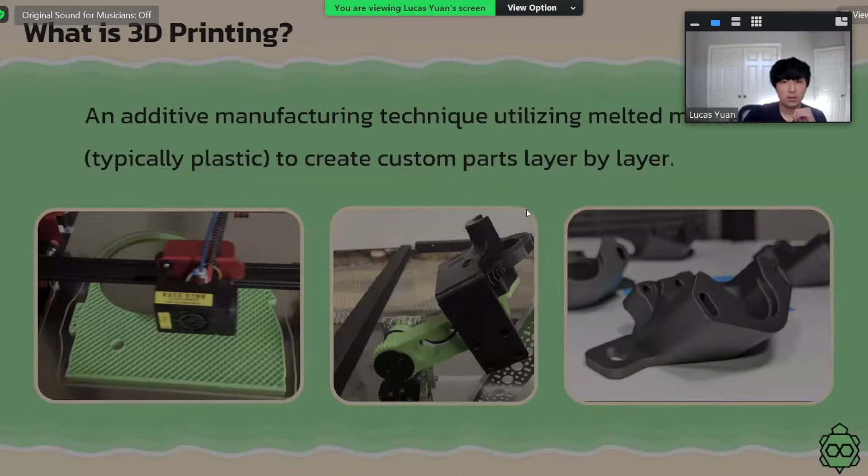As for applications, you can use 3D printing for a lot of different things. A general rule of thumb is that you can print basically anything, as long as it's strong enough, isn't bearing a ton of load, and won't break under the loads we typically see in FTC. Some places it's used are gears and pulleys to power wheels, claws, and arms.

Finally, one of my favorite uses for 3D printing is aesthetics. These are both examples that my team has used. On the left are sponsorship badges that we used on our state bot in Freight Frenzy, and on the right is our worlds bot, where we used 3D printing as a stack between our metal plates to create this kind of turtle shell effect.

I also want to touch on the advantages of 3D printing. The first and main one is rapid prototyping, as well as having quick turnaround times. The second is being able to create precise details. The next would be having more mounting options versus commercial parts.

The reason I say this is because with 3D printing, you can really customize where you're mounting certain things, whereas with commercial or off-the-shelf parts, you're limited to the specific hole pattern of the vendor you're buying parts from. Finally, it also gives you good design experience as well as learning CAD skills.

Yeah, I'll actually talk about that a bit more, but in general for threads, if you're threading directly into a 3D printed part, it's a good idea not to take out that screw and put it in over and over again, because over time it will wear out compared to metal threads. But there are ways to get around that, and I'll make sure to address that in a bit.

As for the disadvantages of 3D printing, prints do still take a long time, and you'll probably be confused because in the previous slide I just said there's a quick turnaround time and that prototyping is rapid. But I think there's a distinction to be drawn here.

The prints do take a long time, but in the grand scheme of things, if you're considering how long it would take to order from a vendor and get those parts shipped and delivered to you, 3D printing would still win out against COTS parts or off-the-shelf parts.

The second disadvantage is that 3D prints are less strong than metal parts. There are ways to increase the strength of 3D printed parts, but in general, plastic is not going to be as strong as metal. So we typically try to avoid using 3D prints in places where a robot would be stressed.

Next is that there's somewhat of a learning curve to 3D printing. While newer printers with better technology are lowering this learning curve, there is still very much a component of knowing what you're doing, which makes it easier to 3D print well and consistently.

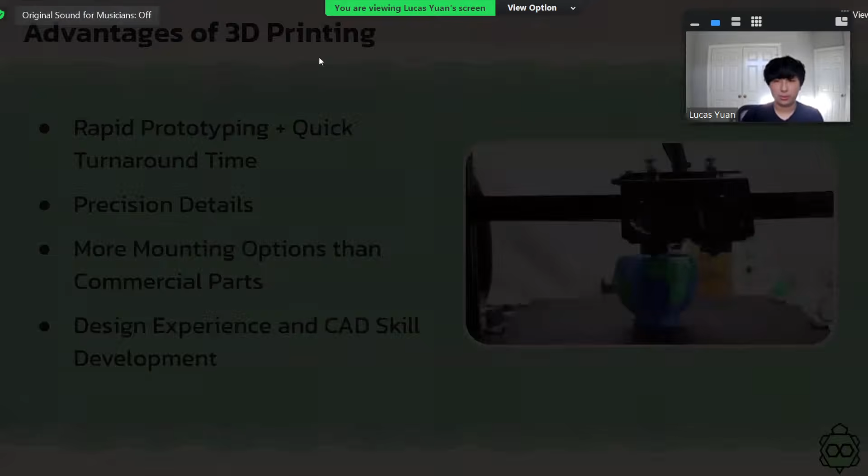And then lastly, 3D printing can be expensive because you have to purchase printers as well as filament, and that adds up a lot over time. But there are newer 3D printers coming out that really lower the cost of entry. Whereas maybe a decade ago it might cost $1,000 to $2,000 to get into 3D printing, now you can get into it at a very low cost while achieving the same, if not better, results.

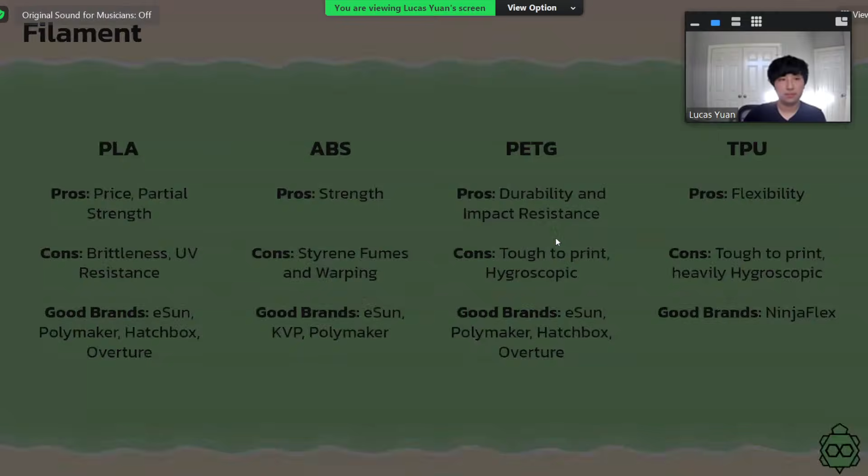Now we're going to talk about post-processing and add-ons, which will also address the question that was asked earlier about 3D printed threads with heat set inserts. So heat set inserts are basically metal inserts made of brass that you use a soldering iron to press into your 3D prints.

So you're basically printing an undersized hole in your prints and then melting around that hole to push the inserts in. These are used to add threads to your 3D printed parts, so that your screws don't round out your mounting holes. The reason I like heat set inserts is that they're really easy to design with as well as use.

But as for alternatives, there are also self-tapping screws as well as just designing a spot where you can put like a T-nut or lock nut inside of. So there are really a lot of ways to get around having to use 3D printed threads. Those are all great options, but personally, I love to use heat set inserts.

Next up, I want to talk about annealing. Annealing is something we do to increase the part strength of 3D printed parts, and it typically increases the strength the most in the Z axis.

So if you think about how 3D prints are made, they stack up one by one. But those individual layer lines create places where 3D prints are inherently weak. Because if you think about a solid piece of plastic, there are no lines where it can crack along. But with 3D prints, those layer lines are inherently weak. So what we do with annealing is we put the print in an oven or a heat source to melt those layer lines down and effectively create one solid part.

Next up, I'm going to talk about how to design for 3D printing, and walk through a couple of examples of parts our team has printed before and how they were specifically designed to print well. The first part of designing is that you need CAD files of your parts, and you can use any software to design them. Our team personally uses Onshape, and I know a lot of teams use Fusion 360, but I'd recommend Onshape if you don't already have experience with other CAD software because it's really easy to pick up, it's browser based, and it has a lot of support.

One of the biggest general rules to keep in mind for 3D printed parts is that you shouldn't have overhangs over 45 degrees. If you look at the graphic in the bottom left corner, the first two pictures show overhangs of less than 45 degrees and equal to 45 degrees, whereas the picture on the right shows an overhang of over 45 degrees. We try to stay away from overhangs over 45 degrees because 3D printers work by stacking layers on top of each other. If you had a perfect 90-degree overhang, you'd basically be printing in midair, which doesn't work. As the overhang angle gets closer to 45, it'll be better, but it'll still require supports, because 3D printers are limited by how fast they can cool the plastic coming out. If it can't cool the overhang fast enough, since it's not supported by anything other than the previous layer, it can result in pretty bad print failures or just not making the part the way you wanted.

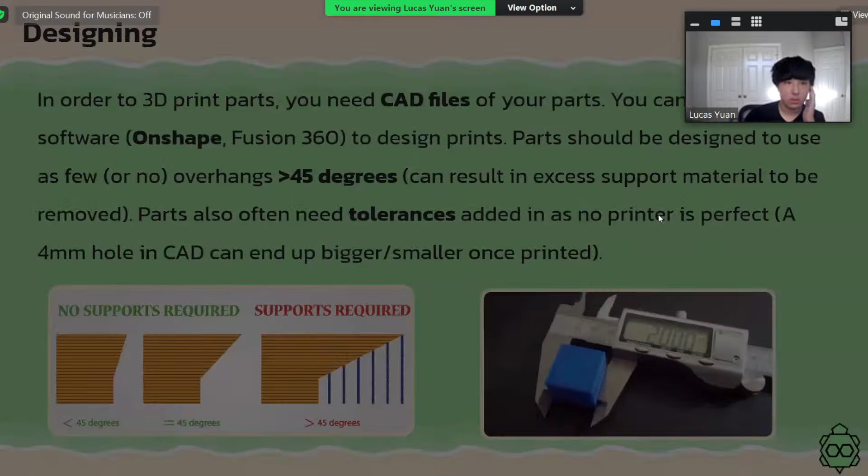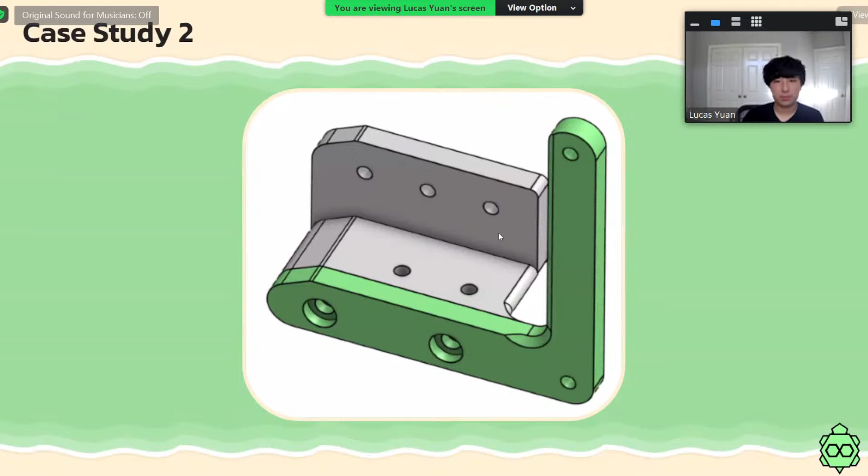The second thing I wanted to talk about here is this two-piece part. It was originally one piece, but it would have been really difficult to find a flat surface for this part that doesn't use supports. So what we actually decided to do was split this part in two, with the green part being one piece and the white part being the other. This allowed us to have two parts that were really easy to print separately, and that we could use screws to join together afterwards.

Now this is one of my favorite parts that I've designed. This was actually a hard stop for our arm this season, so when our arm would come down, it would rest on top of this.

And it also was a mounting point for our color sensors, which is this excess piece that you see here.

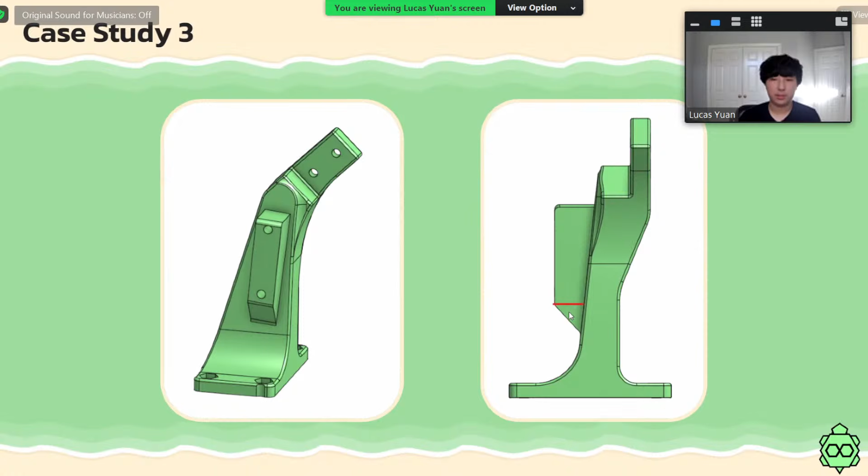The biggest takeaway from this part is designing for overhangs. There are two places where that really takes place: this excess part here, as well as the part at the top. In both cases, the overhang is 45 degrees or less. If you look here, I drew a red line to show where I could have stopped this part had I not been thinking about designing for 3D printing explicitly. But because that was kept in mind, I decided to increase the angle of this bottom part to be exactly 45 degrees so that it could be printed without supports.

Now we're going to talk a little bit about slicer settings. To answer what a slicer actually is: a slicer is the step between CAD and actually printing the object. After you have your CAD file, you put it into a slicing software, and it does exactly what the name implies - it slices your model into the individual layers that your printer reads, called G-code. In the slicer, there are a couple different settings you can configure for your part, and this will change the properties once your printed part is finished.

The second thing is infill, which is what this picture on the right is trying to highlight. There are a lot of different infill patterns you can use - maybe 15 to 20 baked into slicers - but I would really only recommend 2 of them: cubic and gyroid. The reason I picked those is because they're 3D infill patterns, meaning that rather than having the same cross section as you move layer to layer, the cross section changes, which means your strength in the z-axis is less compromised than if you use something like a grid or triangle infill pattern.

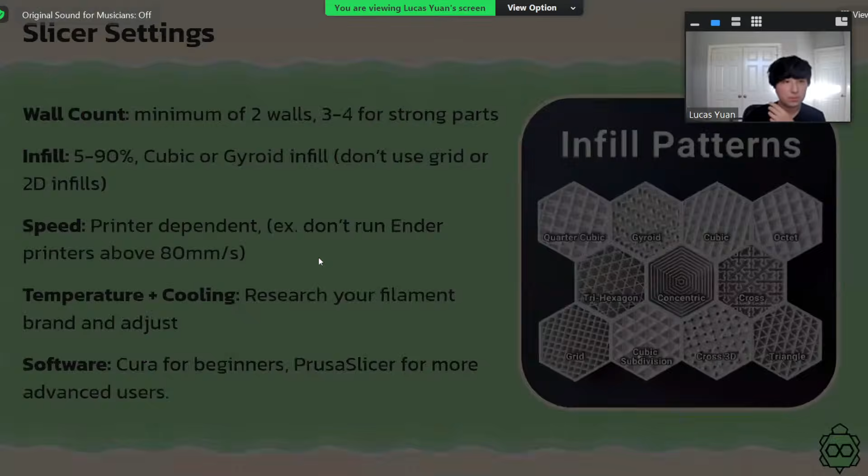The next thing I want to talk about is a little bit about print troubleshooting. There are a lot of things that can go wrong with 3D prints, but I think the biggest thing I see a lot of teams asking about is print bed adhesion.

What that means is how well your print sticks to the build surface. That's really important because we want the print to stay, obviously. Otherwise, our print moves won't be accurate. So if your print isn't sticking to your bed, it could be a couple things.

The first thing could just be that you're printing too high. In that case, you want to adjust the height of your prints or the height of your nozzle down closer to the bed. The second thing could be that your print surface is dirty.

The next thing would be just applying a light layer of glue stick. I actually use glue stick on the vast majority of the prints I do, just because it's kind of a cheat code to creating bed adhesion.

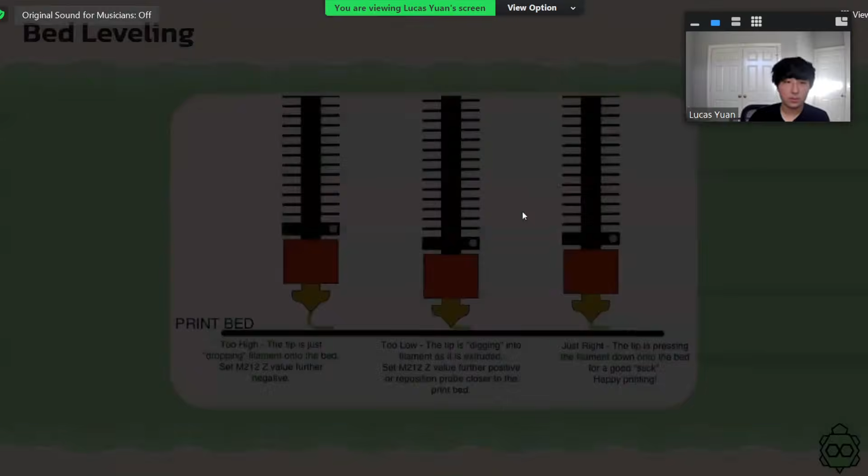And now I just wanted to talk a little bit about bed leveling, which was mentioned on the previous slide. So if your print bed is too high, then the plastic coming out of the nozzle will kind of just be dragged around the bed. It won't really stick to the bed where it was meant to be put down.

Whereas if the print bed is too low, then the tip of your nozzle will dig into the filament when it's extruded, and this will create ridges in your print, which are fairly noticeable. But if your bed leveling and adjustment is just right, the tip is pressing into the filament slightly, but it should stick to the bed very well, and there shouldn't be any noticeable gaps in between the lines of your print.

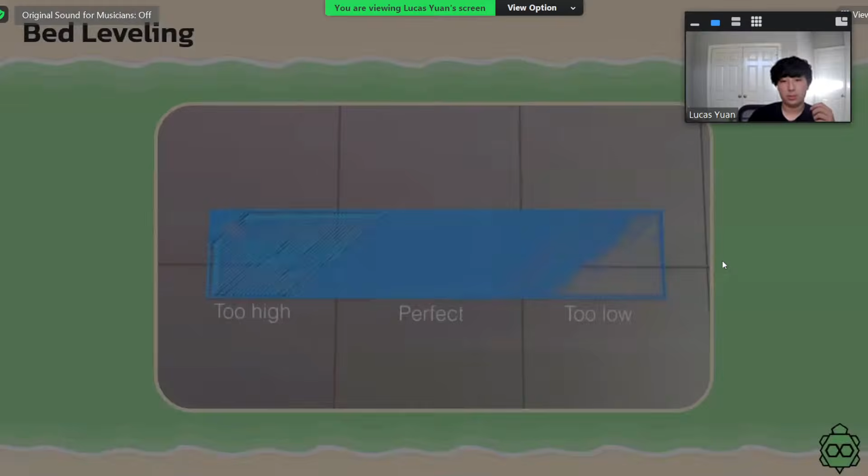So what this kind of looks like is this. On the left, the print nozzle is too high, and you can see that there are gaps in between each of the lines. It's not really staying flush to this wall, these perimeters.

And then on the right, you can see when the nozzle is too low, that you're not really getting a lot of extrusion. You're seeing those ridges, and because the nozzle is pressing so far into the filament, it doesn't really even come out very well. Whereas in the middle here, when your bed level is set correctly, you'll see that there are really no gaps in the filament.

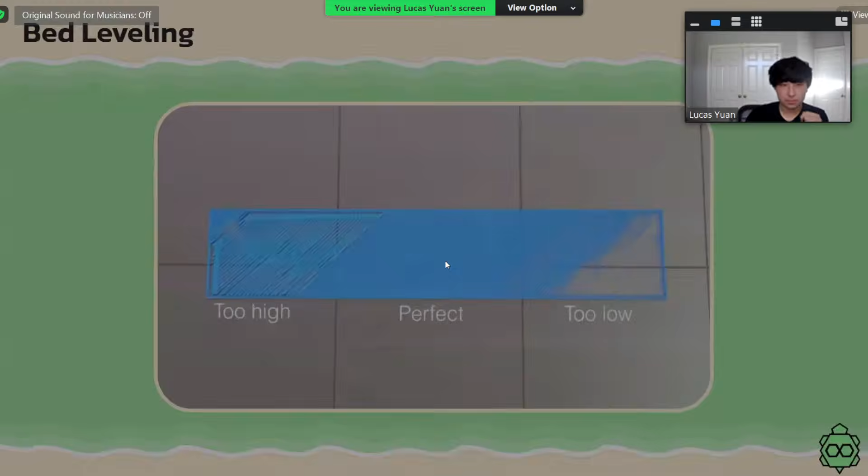So that basically wraps up the presentation.

And I just briefly wanted to talk about some resources for 3D printing. The first one would be FTC Docs. This is the official FIRST documentation, and it has a really long section about 3D printing, which our team contributed a majority of.

The next one is All3DP, which collects filament data as well as gives printer reviews. So if you're looking to buy a new printer, I would definitely recommend looking at some of their reviews.

Next is CNC Kitchen. This is a guy on YouTube who does a lot of scientific and strength testing videos on filaments as well as print settings. A lot of the data he has is really good, and I would definitely recommend checking him out if you're considering doing something more interesting with your 3D prints.

The FTC Discord is another great resource. Specifically, the manufacturing channel in the FTC Discord is really helpful. There's a lot of more knowledgeable people about 3D printing in that channel that will help people troubleshoot their issues. I personally help a lot of teams in that channel, so you can ping me if you're ever there.

Yeah, that's a really good question. For troubleshooting, I think most of the time it's the printer, not the part. There are some instances where it'll be the part, but in those instances it'll be fairly obvious. For example, if you're trying to print in midair, the printer obviously isn't going to be able to do that. But for troubleshooting, generally there isn't a roadmap as to how you go about that. You usually want to identify what the failure case looks like, and then based on that, you can determine a list of things that might be causing it, and go through that one by one.

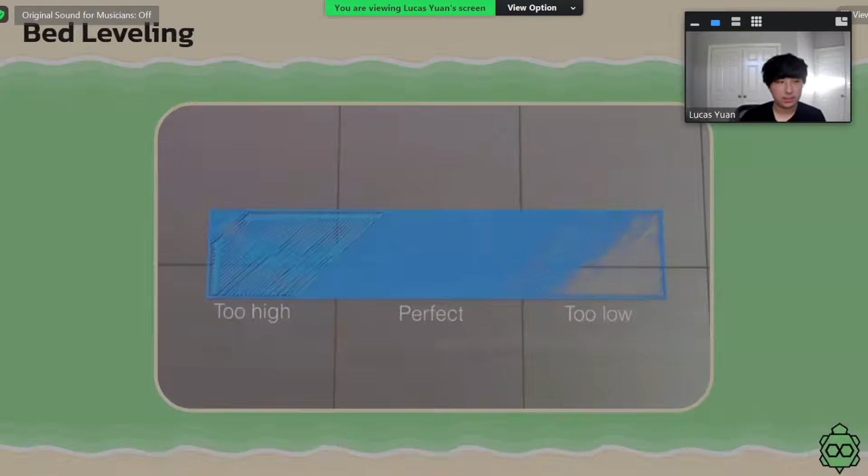That's something that will come with experience, but you can also just use the power of Google. So if you notice that your print is under-extruding, which basically means it's not putting out as much material as it should, you can just Google reasons a 3D printer might be under-extruding, and there are websites that will list every possible reason. Then you can just check to make sure it's not those reasons.

Okay, so Hudson in chat asked, what printer do you have?

I have a VZ bot, and I think Hudson knows that.

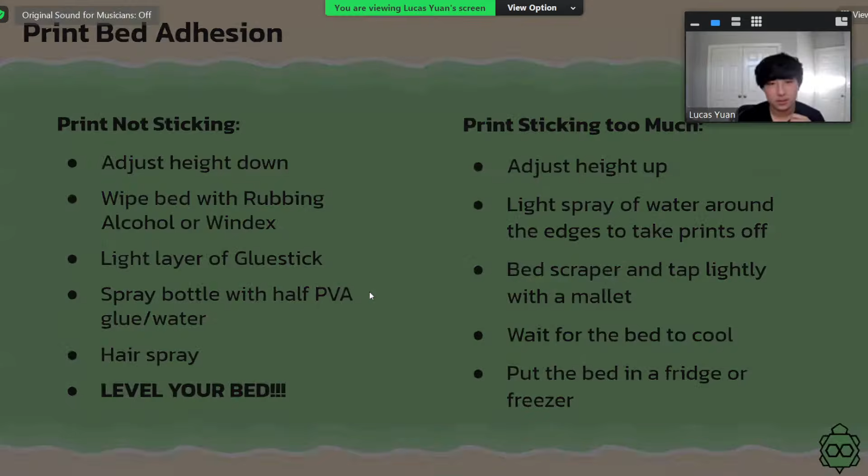Okay, going backwards here. For $1,000, honestly I would get the Bambu Lab P1P over the Prusa Mark IV. The reason is that while Prusa printers are very reliable, the Bambu Lab is just a much better bang for your buck. But I think the Prusa is also a really good option, and if you're already invested in the Prusa ecosystem, the Prusa Mark IV might be worth it.

As for $250, I think getting an upgraded version of the original Ender 3, like the Ender 3 Pro, Ender 3 V2, or a similar Ender clone, can be good. At that price point, I'd recommend an Ender clone because those machines typically have a lot more features than the original Ender series. While they're less tested, they pack a lot of features, and some of the more notable Ender 3 clones actually have a lot of users and an established knowledge base as well as support team.

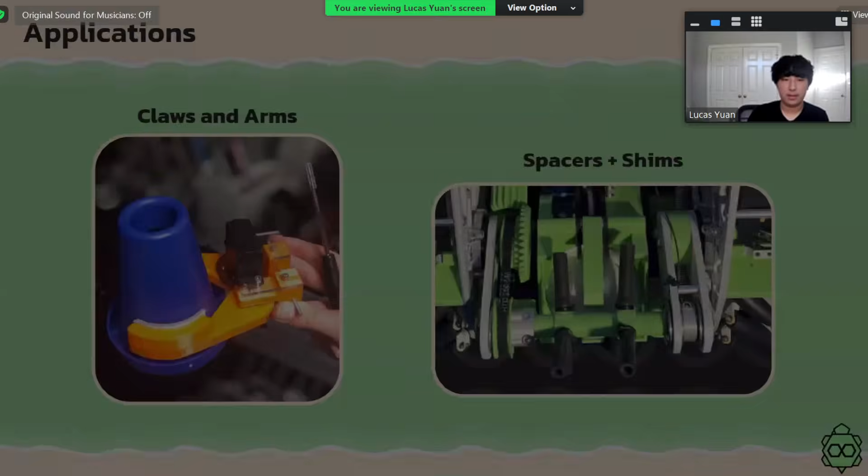But generally, for the majority of parts, particularly the ones I listed at the start, you won't really need exotic filaments. I do know they're being used more by teams and becoming more accessible. Specifically, blends of typical filaments with carbon fiber or other exotic materials are much more affordable and usable than they were a couple years ago. Off the top of my head, PLA carbon fiber, ABS carbon fiber, glass fiber infused filaments, and stuff like that is a lot easier to use now.

Yeah, I know Prusa does this specifically. I think there are merits to going both ways. If you're getting a printer kit to build yourself, typically it will be cheaper. Another thing that isn't really mentioned is that building a printer can actually give you a lot of experience in the mechanical aspects of FTC. I actually built a Prusa Mark 3S Plus around two-ish years ago.

It was a very fun experience because Prusa does such a good job of documenting those instructions. They have their own forum for people building the printers, so if there's something even the instruction manual misses, which is very uncommon, it will almost always be answered by the community. It's just a very well documented process.

But as for going pre-assembled, I also think there are merits to that, where you don't have to worry about assembling something wrong, or if you're just not confident in assembling the printer, getting pre-assembled would be a better option. But getting a pre-assembled printer does typically cost more than a kit build. For Prusa specifically, the price I have here is for the pre-assembled version, whereas the kit built version, I don't have the number off the top of my head, but I think it's 899 or a little bit more.

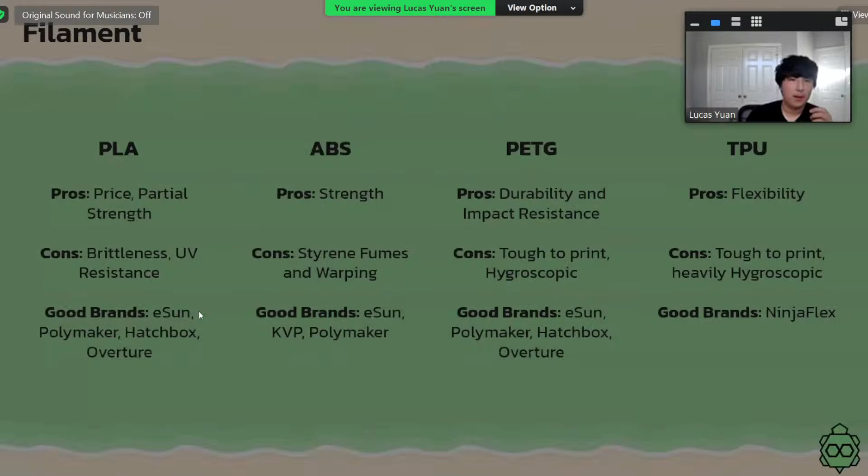Another question by Hudson in chat is, do you think there's a place for SLS printing in FTC? Yes, but for the vast majority of teams, they will not need an SLS part.

For people that don't know what SLS is, it stands for selective laser sintering, and it's typically used to selectively laser sinter out metal parts. So it is a form of 3D printing, but you're printing with metal, which I don't think the vast majority of teams need, but it does have its use cases in FTC.

Adding on to Hudson's question about different types of printers that aren't FDM, what are your opinions on resin printers, and do you think they're better or worse than FDM for FTC? So for resin specifically, I honestly was considering getting a resin printer for personal use.

But I do think that for FTC specifically, FDM is a better choice. The reason I think that is because resin is typically used to get parts that are very, very detailed. The biggest example of that is people who buy resin printers typically use it to make things like minifigures for board games, and that's the level of detail they can achieve.

But for FTC, a lot of the parts we're printing aren't that detailed. They're more macro scale and we need functionality over details. The other thing is resin parts typically tend to be less strong than FDM parts, just because of the way resin printing works. While there are high strength resins, I think FDM printers just win out overall.

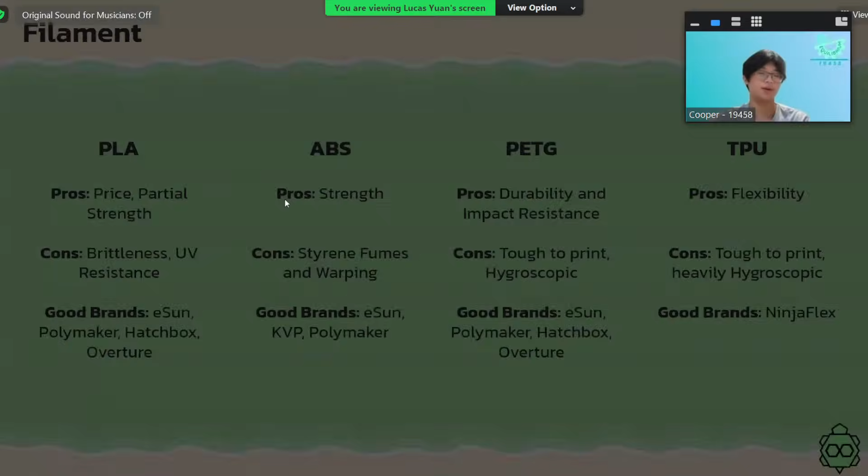Another question - can you tell us a little bit about multicolor printing? Do you recommend getting a specific printer for that, or do you recommend just stopping the print, changing the color, and restarting it?

For a specific printer, I would recommend any Bambu Lab printer with their AMS add-on. Basically, each AMS unit allows you to print with 4 different filaments, and you can link together multiple AMS units - up to 4 AMS units for a potential of up to 16 different filaments.

Another option I would consider is maybe going the open source route. There are 2 projects that are fairly similar: the Voron Enraged Rabbit Carrot Feeder and the Annex Trad Rack. Those are both multi-material systems that are open source that you can build.

As a team that does a lot of 3D printing, our main printer is a Bambu Lab X1 Carbon, and I think it does a very good job for us. However, I do think that in the end, more printers will win out over more expensive printers. So while I wouldn't necessarily recommend getting multiple Enders, since Enders might take more maintenance, I would definitely get maybe 2 Bambu Lab P1Ps, or maybe 3 Prusa Minis, or 5 Ender clones, rather than a Bambu Lab X1 Carbon.

The reason we went for an X1 Carbon specifically is our team does like to experiment with certain engineering grade filaments, as I mentioned before. Also, the way our team does our design process means that since we have to wait for our plates and other stuff to be shipped anyway, we do all of our printing while the rest of our stuff is getting shipped, so we don't really have to print on a time crunch, if that makes sense.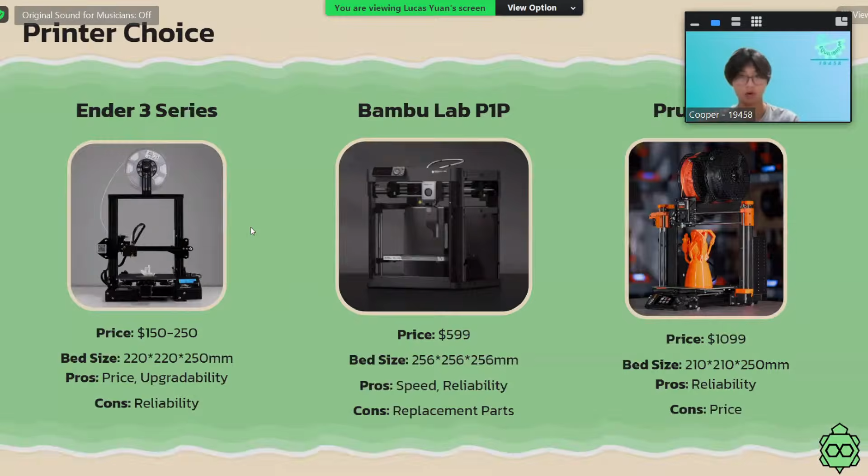Well, it's about 7 o'clock, but before then, one other question: you talked a little bit about printing while parts are shipping. What's a recommendation for people who are custom manufacturing parts in-house? How do you recommend they get all the parts printed in time? Do you recommend printing a couple days before the building process starts, or printing parts as they CAD them? And what do you think about 3D printing for prototyping, and how can people speed that up?

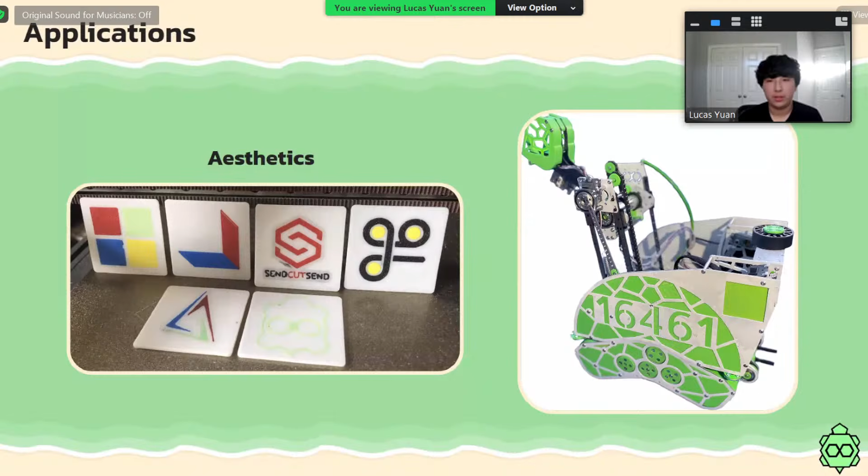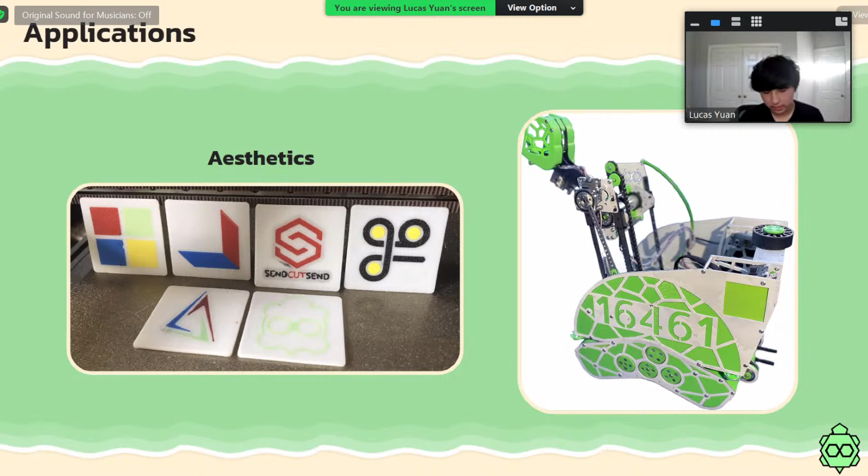Yeah, so for getting prints done in time, if you CAD a part and you know you're not going to change it, there's no harm in just printing it out because you're eventually going to use it at some point. That's one way to go about things. But if you know you're probably going to end up changing a part, or just its look, I'd recommend once you're fully done with your CAD, print everything out in batches before you assemble.

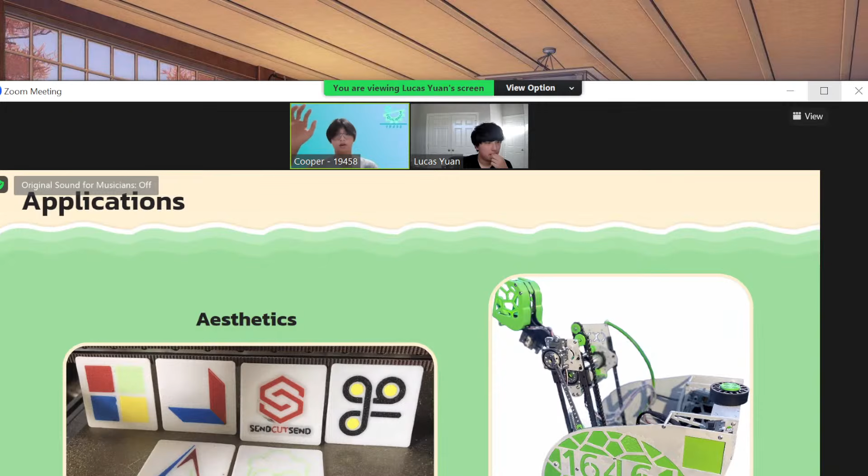So you order a bunch of parts before you build, or you print a bunch of parts while you're ordering parts to be manufactured. My question was, how about when you're just trying to print--

Oh, okay, I saw something went wrong with the stream, so I got a little distracted.

But how do you deal with printing if you have to print really fast to prototype something or quickly put on an iteration? Do you have any tips for making that process really fast? Should we use a faster print speed or lower filament? Any tips for that?

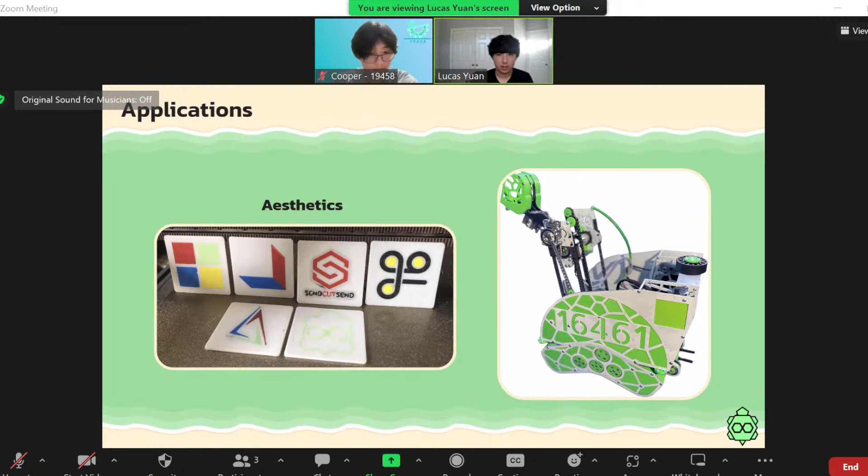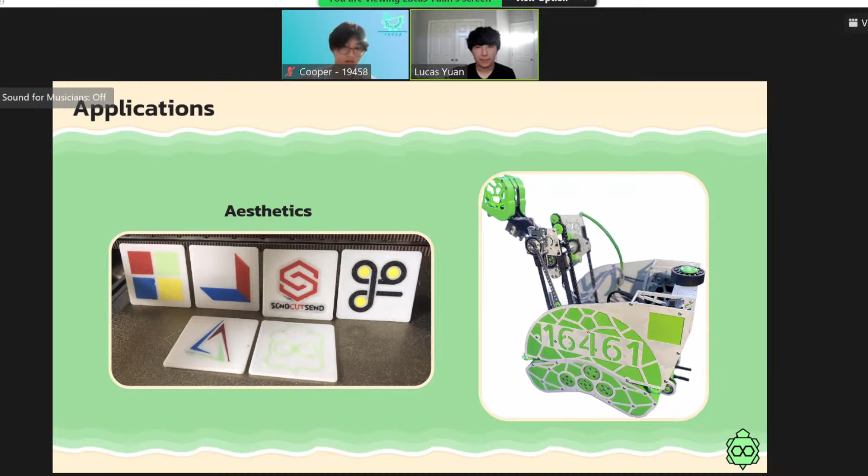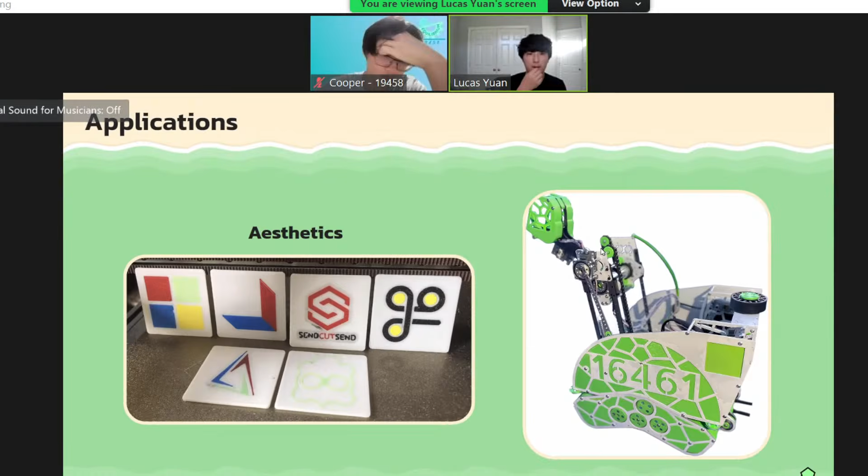Yeah, for sure. There are a lot of things that go into making 3D prints faster, but in general, one would be using larger layer heights. If you have the ability to use a larger nozzle size, both of those things will cut down drastically on time. If you use a larger layer height, for example 0.3 millimeter layers versus 0.2, you can reduce the amount of layers by like 30%, which is a huge time saving. And if you use a larger nozzle size, your walls can be thicker and the line width of your prints can be thicker.

And that allows you to use less walls, which speeds up the process a lot. There's been a lot of debate in the community because the standard nozzle size most people use is 0.4 millimeter. But in the past year or so, a lot of people have switched to 0.6 millimeter nozzles because you don't see a huge drop-off in quality while still getting a significant increase in speed. I think there's huge merit to using 0.6 millimeter nozzles in FTC specifically, because we're not printing extremely detailed parts. With 0.4 millimeter nozzles you see an increase in detail for really fine details, but with 0.6, the speed increase is so good it almost puts 0.4 millimeter nozzles out of the question.

Another tip for getting prints done quickly for prototyping and testing would be to remove material. Any material that isn't necessary, you should just take out—whether that means making your part thinner, or if it's a solid piece, taking out a section in the middle if you don't need it. Because at the end of the day, if these parts are for prototyping only, you don't need them to hold up over the course of a season. You probably only need them for a few minutes or a few hours at most, and then you're going to create a final version with the attributes you actually want.

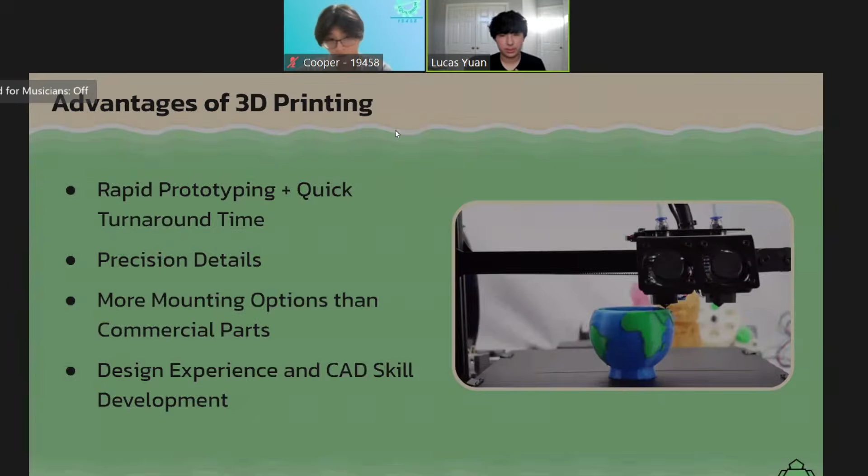Another tip is to decrease the amount of infill, maybe to 10 or 15%, and use fewer walls—maybe instead of 3 or 4, using only 2. Obviously this depends on the part you're prototyping, because of stresses and things like that, but reducing the amount of material you have to put out is another big factor.